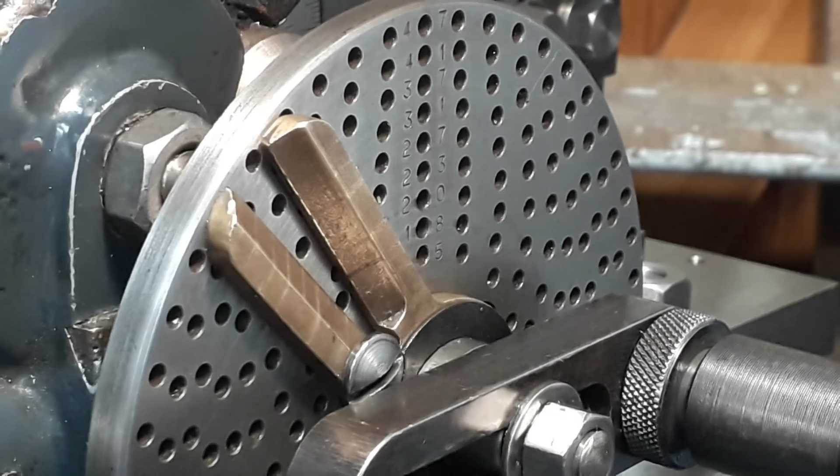But first, before we actually get to cutting, we've got to set up the dividing head. As I'm intending to cut a 14 tooth gear on this blank and an 11 tooth gear on the next blank, we need a hole pattern here which will enable us to do that.

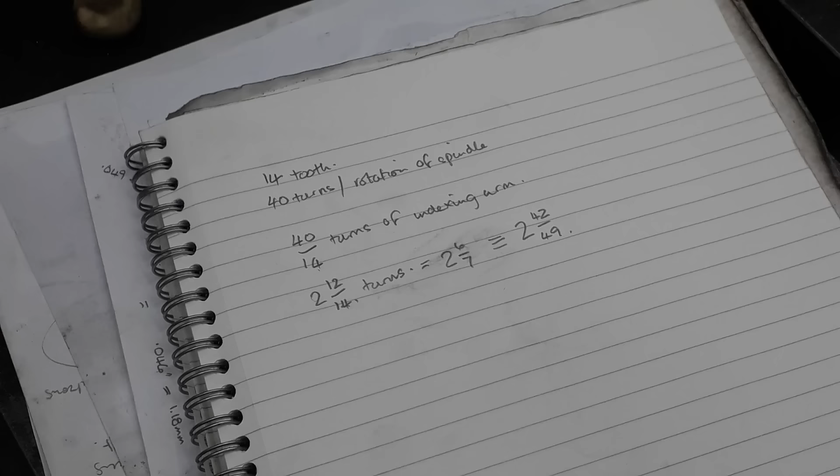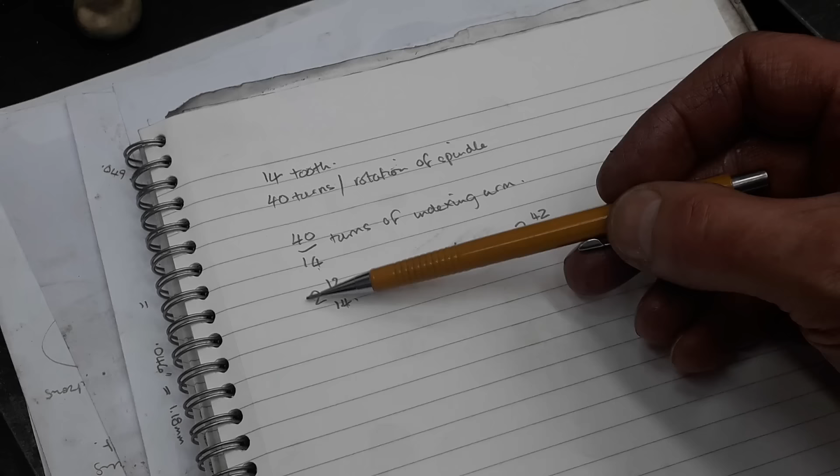So this is how I determine which hole circle we're going to need. I don't rely on tables, I just do it from simple rules. We have a 14 tooth gear. The dividing head we have requires 40 turns of the handle for one rotation of the spindle. Therefore, to index from one tooth to the next, we need 40 divided by 14 turns of the indexing arm. Now 40 over 14, if we remove the whole part, there's 2 turns plus 12/14ths. Reducing that down, that's 2 and 6/7ths in its basic form.

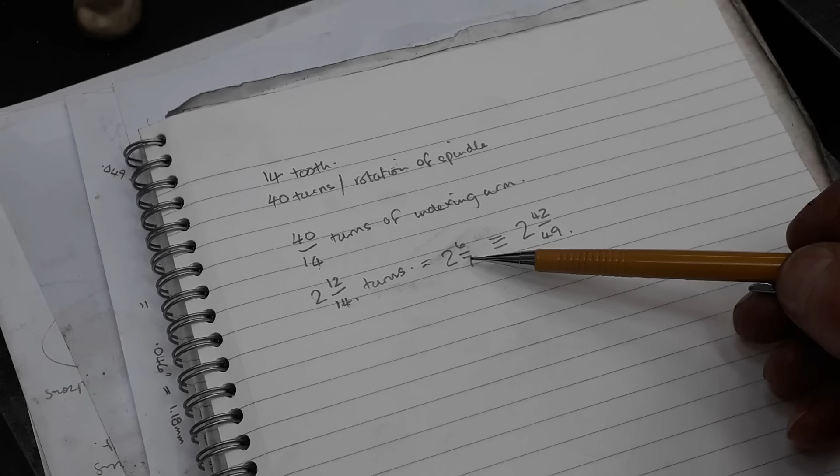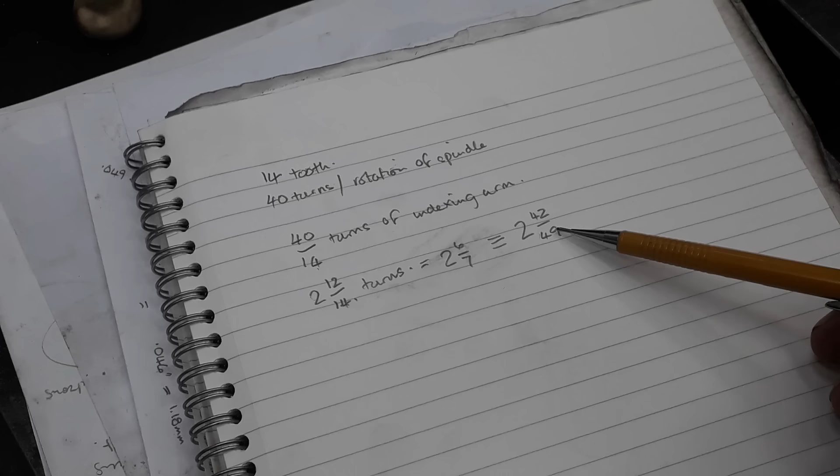So we don't have a 7 tooth plate, we don't have a 14 tooth plate, but we do have a 49 hole circle in the plate. So if we multiply the bottom by 7 and the top by 7, we need 2 turns and 42 holes of a 49 hole circle plate. And that's what we use. Simple as that.

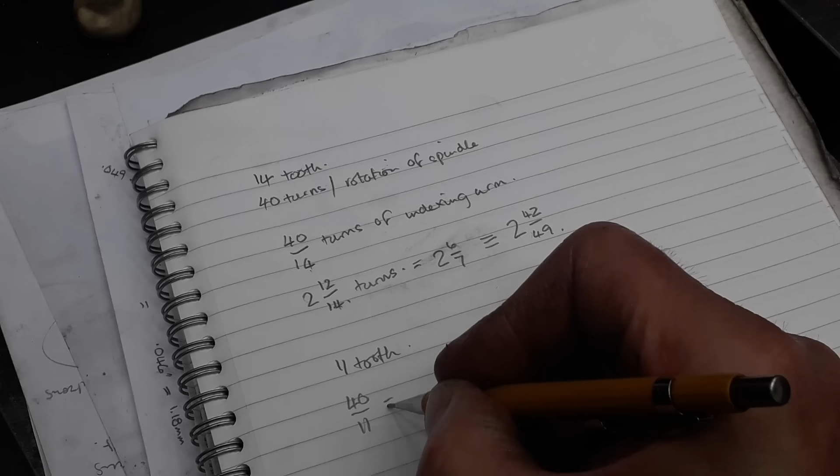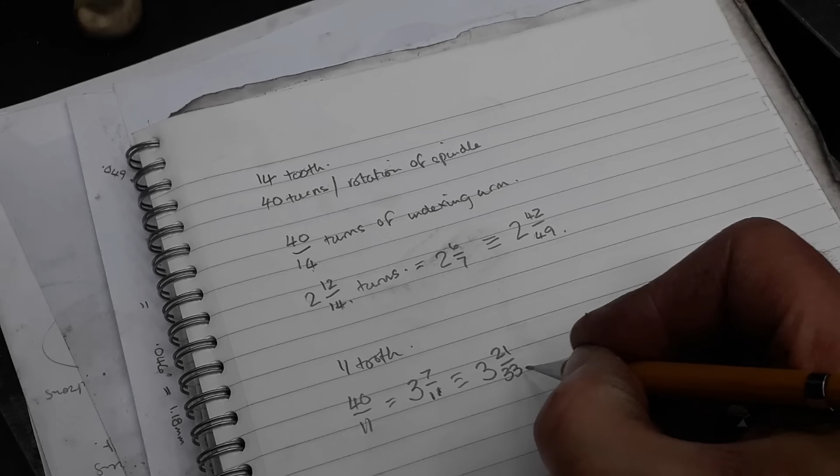If we were going to repeat it for the 11 tooth gear, we would need 40 over 11, which equals 3 whole turns and 7/11ths. Now we can't reduce that fraction any further, that's fine. We don't have an 11 hole circle, we need something which has a factor of 11 in it. We do have a 33 hole, so if you multiply top and bottom of the fraction by 3, we need 3 and 21/33rds. So that's 3 whole turns and 21 holes of a 33 hole circle in the plate. That's how we do it. Simple.

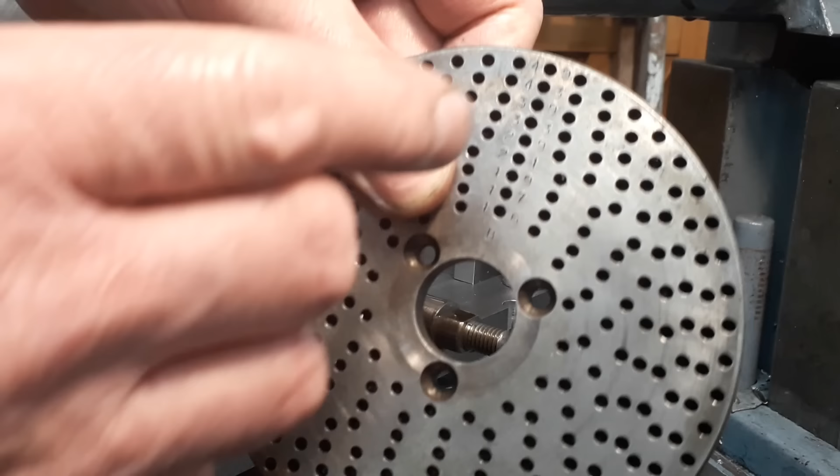So this is the plate that we need. It has a 49 hole circle there, and a 33. So this will do the 14 and this will do the 11.

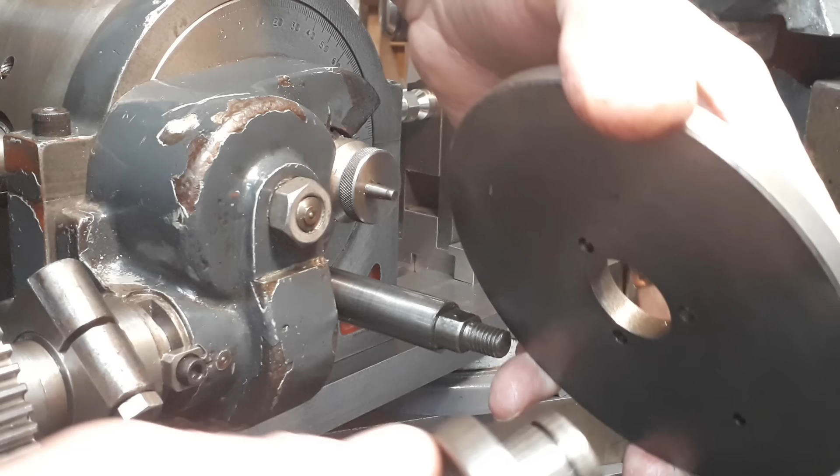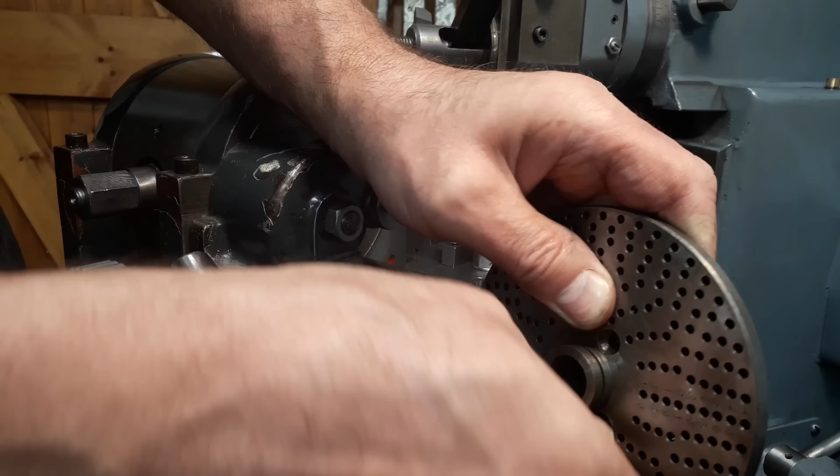So now this goes on here, line up the holes. Fiddle around and get the screws in. Drop the Allen key. Drop another one. These do not need to be stupidly tight, they're not really taking very much force. And as they're these countersunk headed ones, if they're done up too tight, they will only be more difficult to undo, and then the little hex heads will give way and I'll be left looking for some new ones.

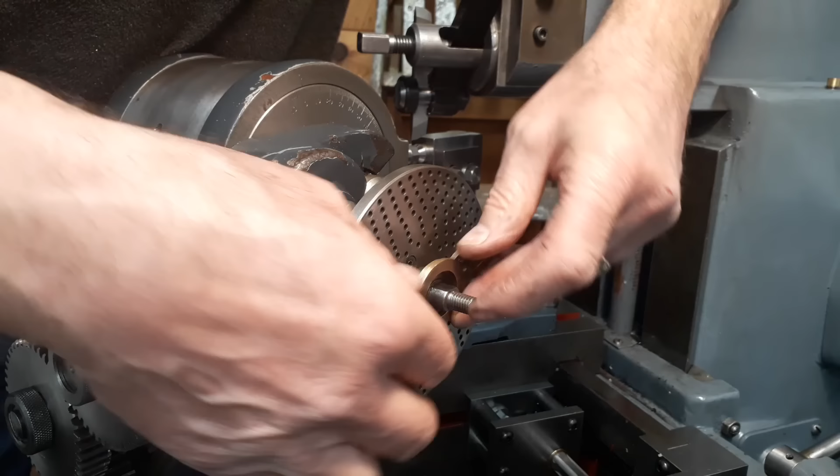So that now goes back on there. I'll dig out the sector arms. And two. Pop the clip on. Rotate the arms. So this little screw can go in. And these are ready for setting up.

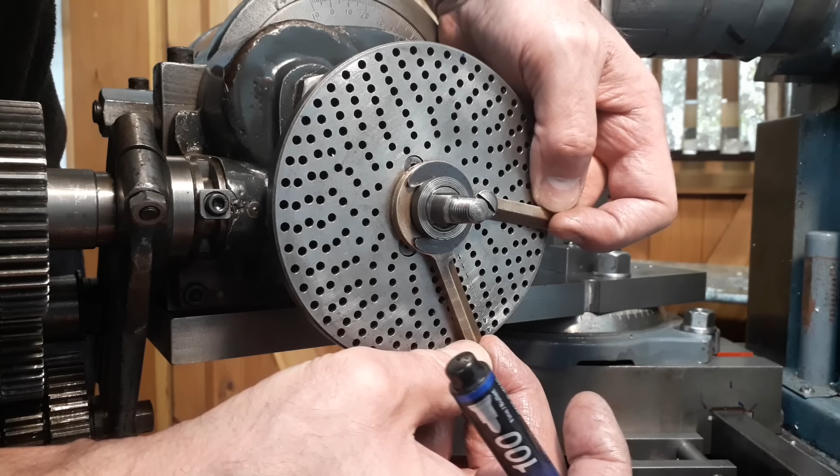Okay, so now we determine where to place the sector arms. We're going to use the 49 hole circle, so we're going to start off in this one here. We then need to come 42 holes past this one, so we don't count that one. Then we'll have to go to that position there, so that's where we'll tighten it up. Normally you do this with the indexing arm on, but because it's off, it's actually easier to do it while it's off, so I've taken full advantage of that.

And there we are. We will move from there, go all the way around the outside to there. We will then advance this like that, and then the next time we'll have to go all the way around to here, not forgetting to make the 2 whole turns as well.

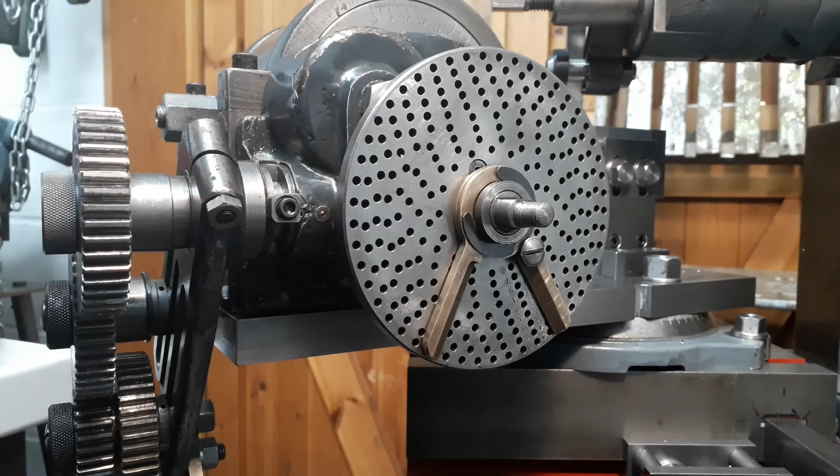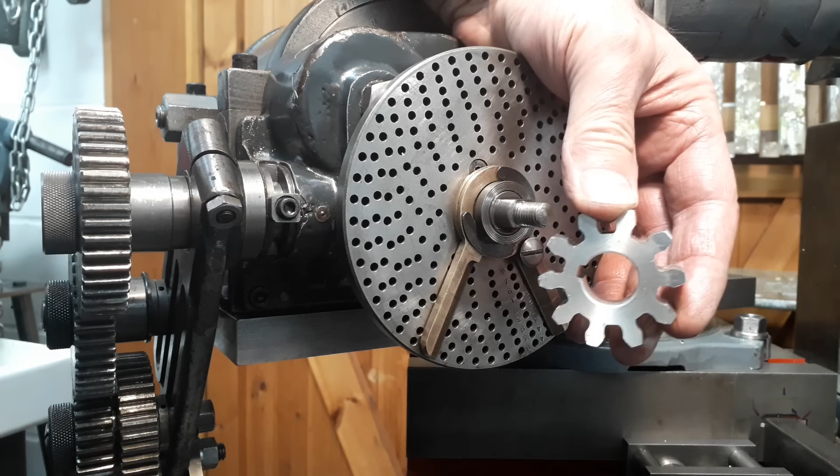It's worth taking a bit of care over this, because if you get it wrong, the results are, shall we say, disappointing. When I was testing out the spur gear fixture at one point, I just wanted to prove that it would cut the undercut properly and create a gear. This has got far too few teeth for the size of gear, but just purely as an experiment, I cut this one in aluminium, and this, as you can see, is a 10-tooth gear. Now, if you get the indexing wrong, what you end up with is something that looks much more like this. As you can see, this is a 9.5 tooth gear. It doesn't work.

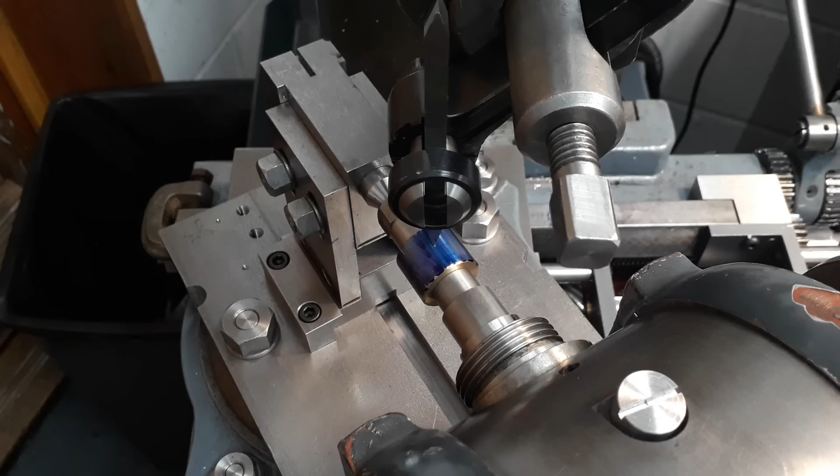Okay, so if you've sat through all this video so far, now we've finally come to the point that you've been waiting for. We're going to cut the gear. So I've blued up the blank, I've checked all the nuts and bolts around everything to make sure everything's tight. I've oiled all the gears, everything that needs a touch of oil, and I'm ready to set it going, feed the tool slide down until it scratches on the workpiece.

I then need a depth of 108 thou from there. So let's begin. You've got pretty much the view that I've got from up here. In fact, if truth be known, you're slightly closer.

Here we go, we are just scratching the surface there.

I'm going to take a first cut of, say, 50 thou. This is bronze, not aluminium, a nice easy machining bronze, C660. So firstly, let's wind everything back to about here. Should be a good starting point. Let's put on 50 thou of cut.

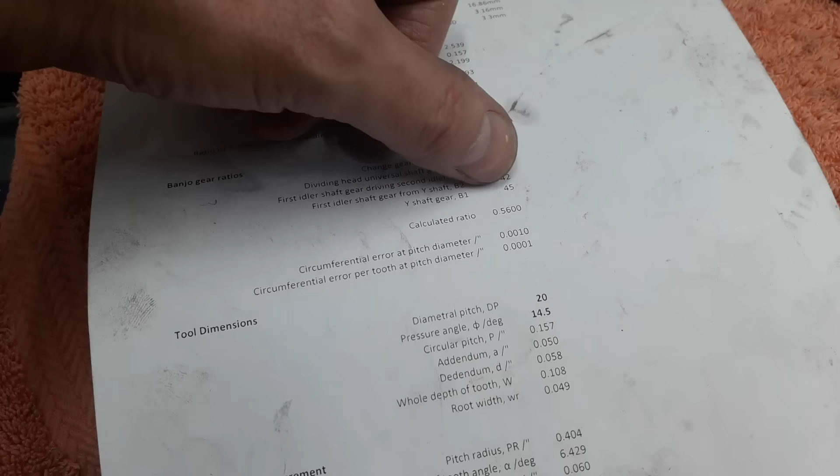We need a ratio of 5598, and what I've effectively done is I've put the 45 gear on the dividing head, whereas it should have the 24. So I've got the gear train backwards, so it's feeding far too fast. Whoops.

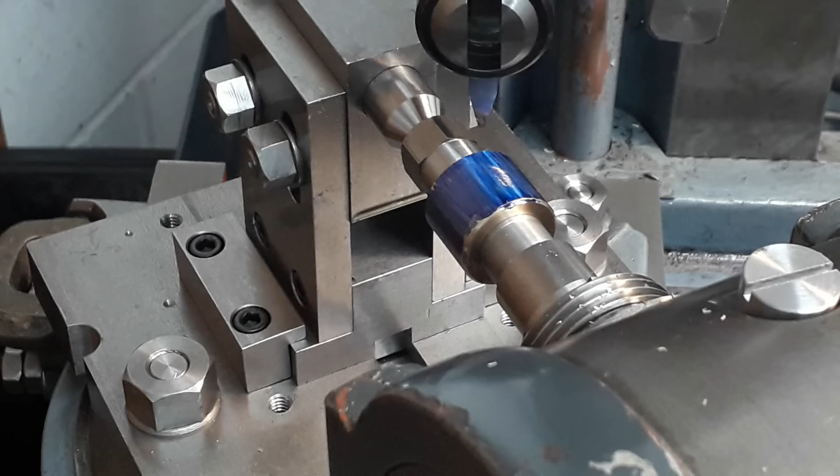Right, we're ready to go again. We have the replacement gear blank in there. Everything is set up as it should be. I've had my trial practice on the one that I stuffed up.

So let's get the shaper moving and touch off and then start cutting the tooth. We're going to go 50 thou at a time.

Okay, this is failure number 2. Whilst I was messing around with another camera, let me go handheld and show you what's happened. The gear down here, the helical, is disconnected.

And so for the third time of asking, let's touch off and put some cut on. There we go, just touched off. Here we go, cut's just starting. Clear, and off we go again.

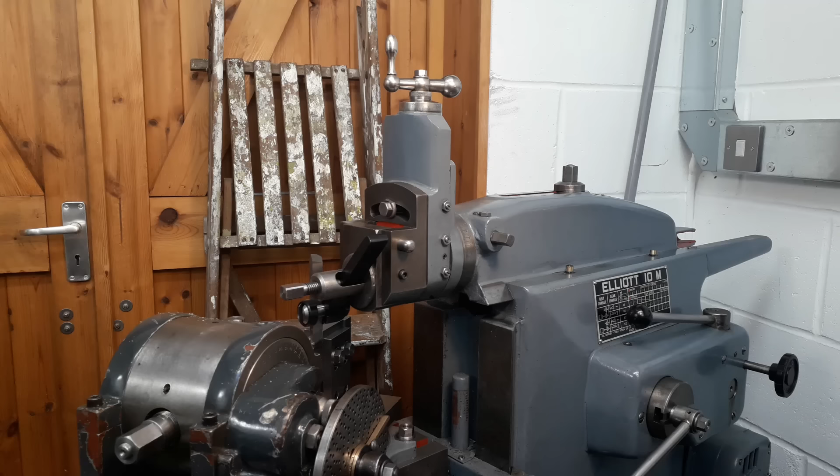Right, time to set up for the final pass. Now, the depth for the gear should be 108. I'm going to give it another 2 thou to give it a little bit of clearance for backlash so that it will run at the expected spacing.

Last but one tooth, just this one, the next one, then out it comes, bit of deburring, clean it up, and we'll have a look at it on the bench.

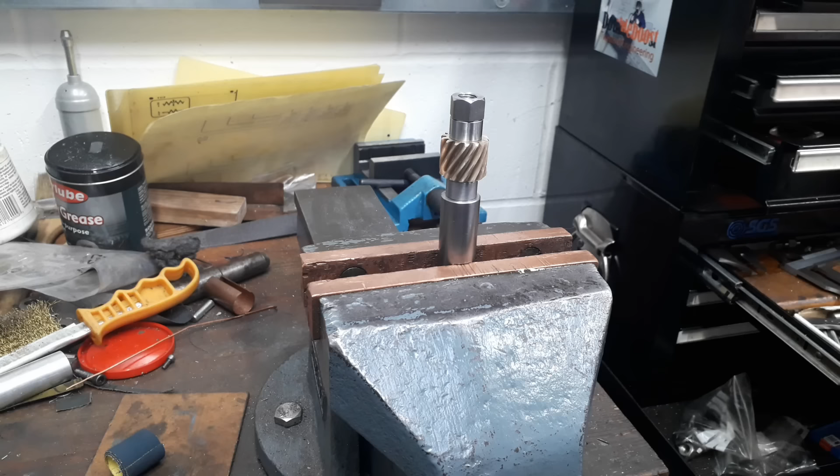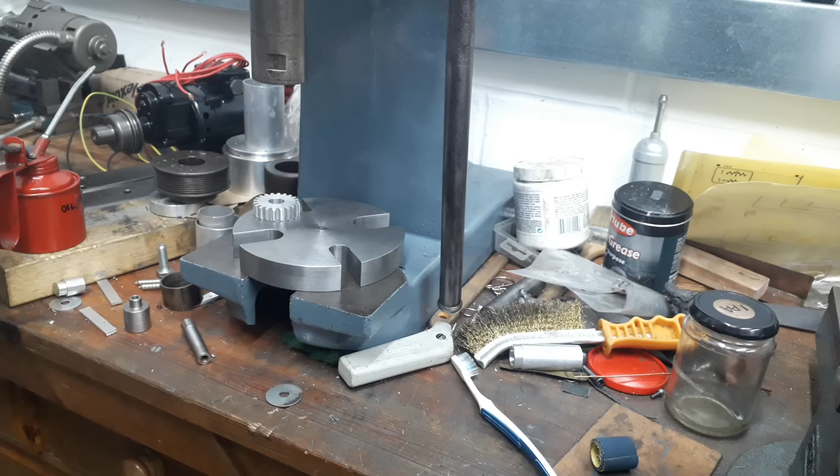There we are, all done. Okay, so here we go. Pop that in there. There it is. That fits in there.

Don't know why I put my finger underneath expecting it to drop out the bottom. That would have been going some. There we are, if it will focus.

Now to cut the next gear, this is the gear blank I'm going to use. It's going to be a 20 dp gear, the same as the previous one. This one is a little bit smaller, hence I've not put it on an arbor - it's actually part of a spindle. This one will be 11 teeth. It'll be 30-degree helical, just like the last one, but I'm going to make this one a left hand, which means that they will then mesh together with parallel axles.

So the first thing to do is going to be to disconnect the drive shaft down here. So, I'm going to slide off the banjo.

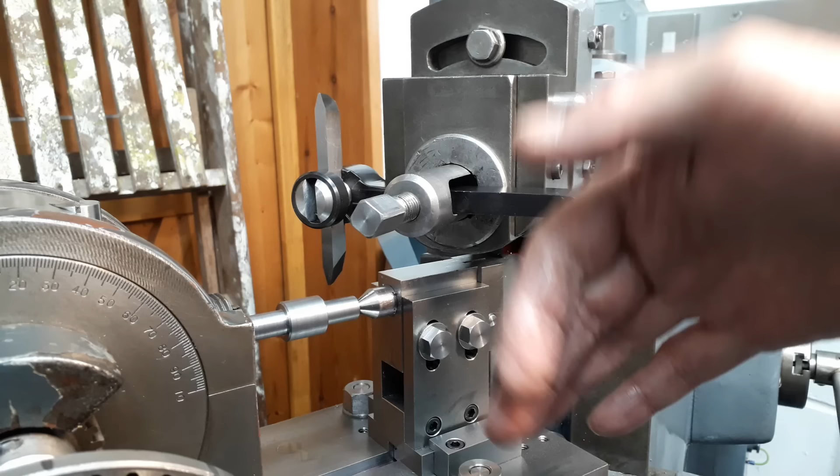As it's a left hand gear, if I bring it back on centre, the whole table will move so far to the right to do the cut that you run out of stroke basically on the table. The table will crash into the gears.

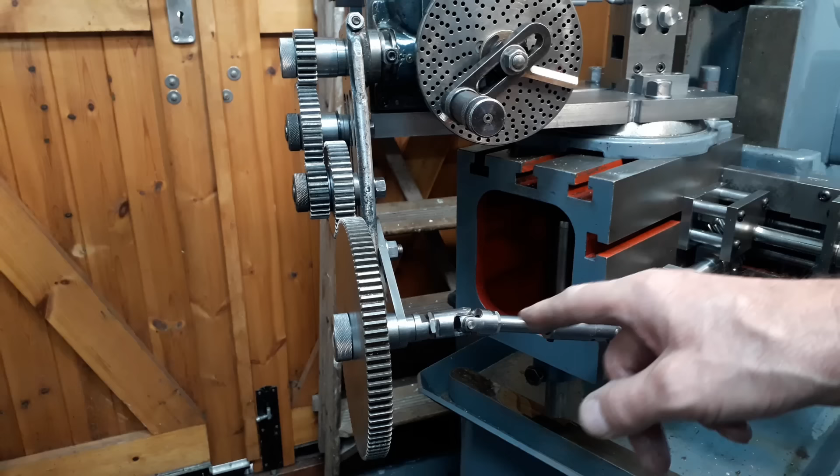So here we have the new gear train set up. This time I've verified it on a blank to make sure that it is cutting correctly. It has to be, this big gear has to be angled right over here as far as possible to keep the angle on this universal joint as low as possible. Otherwise it's not very smooth, it doesn't work very well. I mean, these things go to 45 degrees theoretically, but they don't work very well once you get anywhere close to that.

But it's already all set up. The indexing is all set up and ready to go. So let's cut the gear. Clutch off. A little bit heavier than I wanted, but that'll do.

Bring it back. Put 25 thou on. Lock the tool slide. And off we go.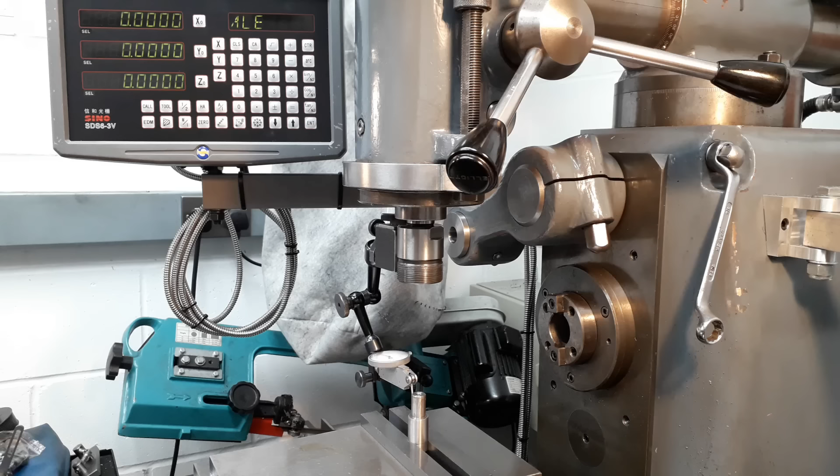So I'm going to attempt to measure the distance between the two shaft centres when these gears run nicely. If you get them too close together, they grind. If they're too far apart, that's difficult to tell because there'll just be a lot more backlash.

I'm going to use a technique that I borrowed from another channel, from Tom's Rabbit Hole. If you're not familiar with that channel, I'll put a link in the description. But if you're into gears, Tom has a homemade hobbing machine that he's been building, and there's a lot of interesting content on there, so well worth a watch. Anyway, thank you, Tom. This is his technique, and we'll attempt to use it to measure these two gears.

In the vise of the mill, I have a stub shaft. I have a DTI which I'm rotating around the stub shaft, and it's indicating to me that the spindle is now concentric with the axis of this stub shaft.

I have a DRO on the mill which I'm going to use to measure the position of this stub shaft relative to the spindle. So this has been zeroed out. I've zeroed the DRO.

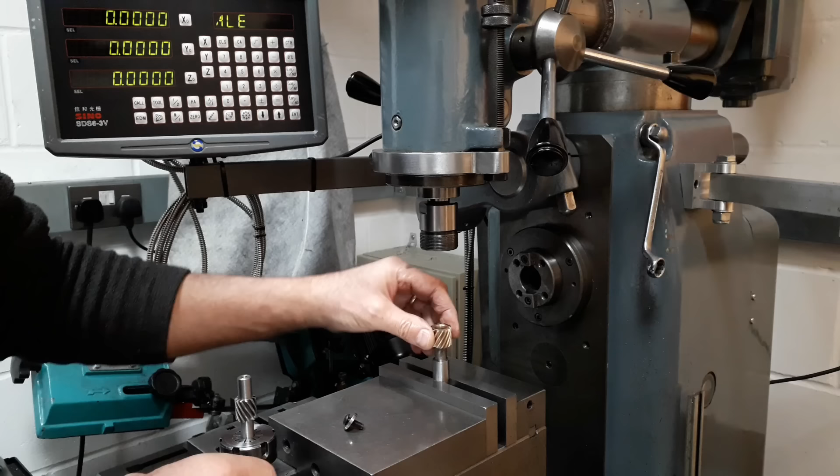So now we'll remove the DTI, place this little bronze gear on the stub shaft, rotates freely, put a washer and a bolt. This will keep it captive. As these are helical gears, there is axial thrust on them, up or down depending on which way they're going. That's now still free to rotate. I've got the 11-tooth steel gear secured in a collet.

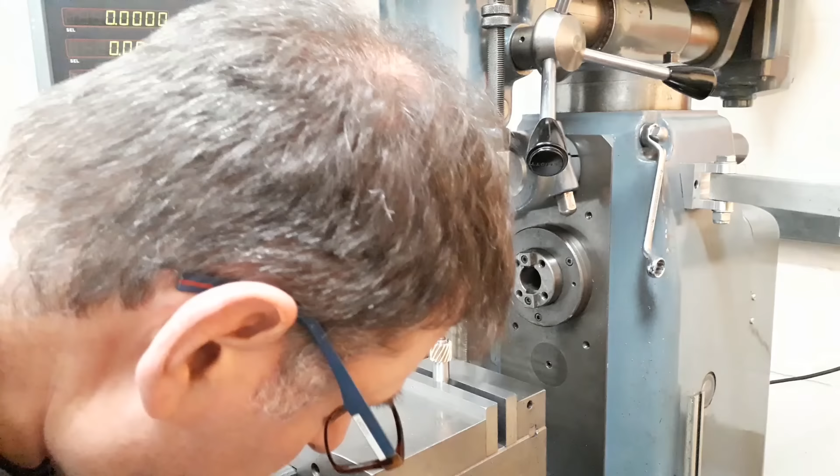Which will then nip up tight. Let off the emergency stop. DRO is reading 0. We will now back the spindles away from each other.

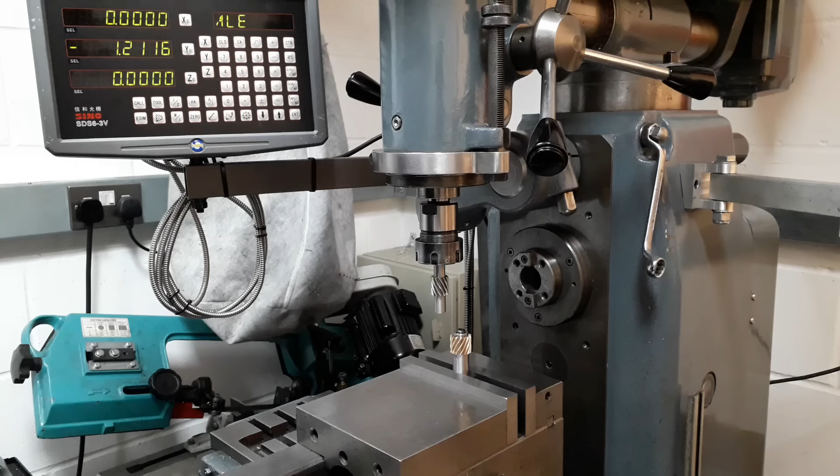I will now raise the knee until the two gears are at the same height, like that, and then bring them slowly together and bring them into mesh.

So now they're in mesh, and if I operate the spindle, they rotate very nicely. I'll bring the two gears closer and closer together until they start to grind. Then I'll back off until they run as quietly as they're going to. And at that point, we can measure the separation on the y-axis here. That'll be the separation between the two spindle axes. We can then compare that with the ideal.

Can you hear the grinding noise? Somewhere around there? They sound reasonably good. So we have a figure of 721 thousandths.

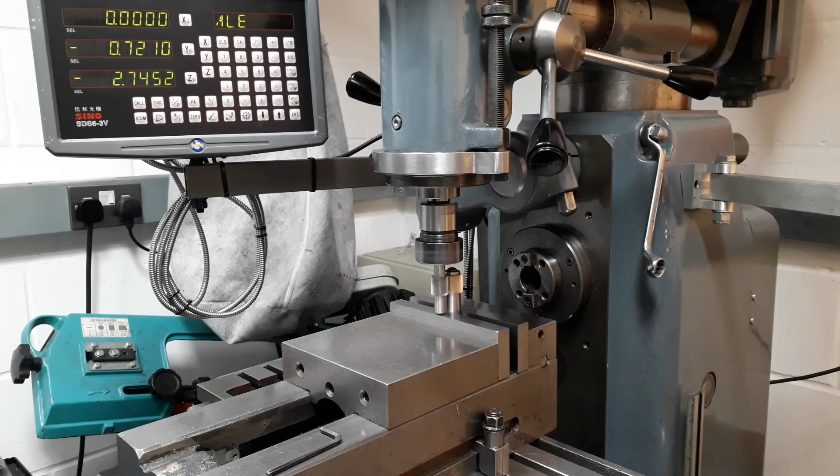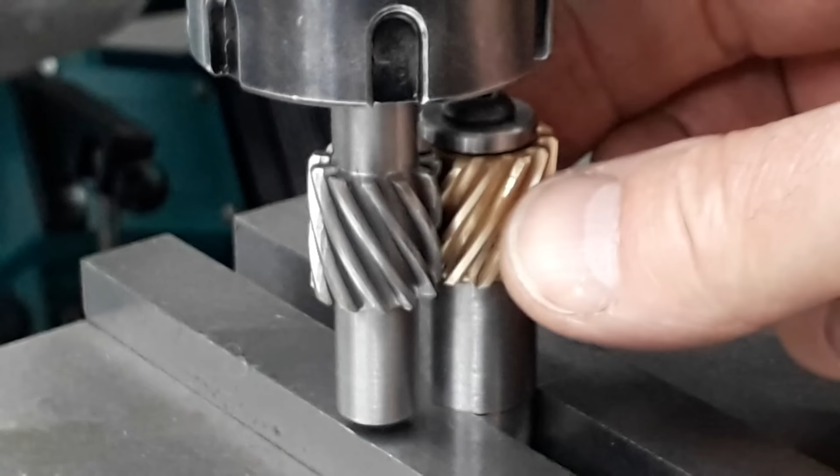So zoom right in, this is the pair of gears at the spacing we've just measured, and there's just a tiny little bit of backlash on it, which is pretty much how you'd set up your change gears in your lathe.

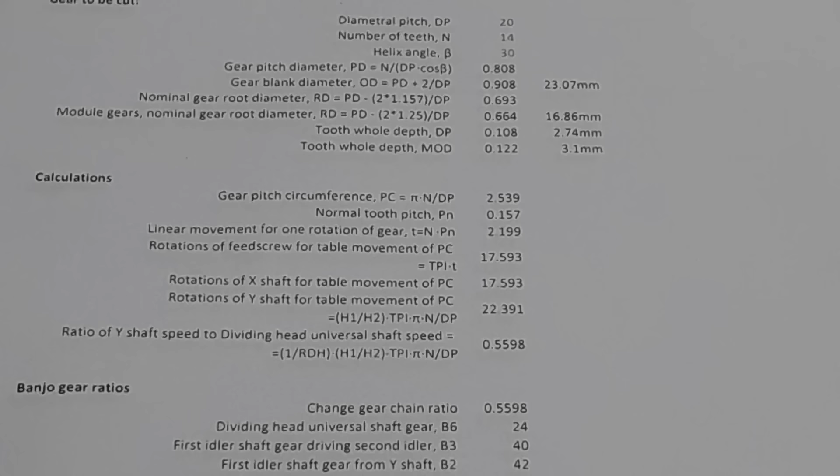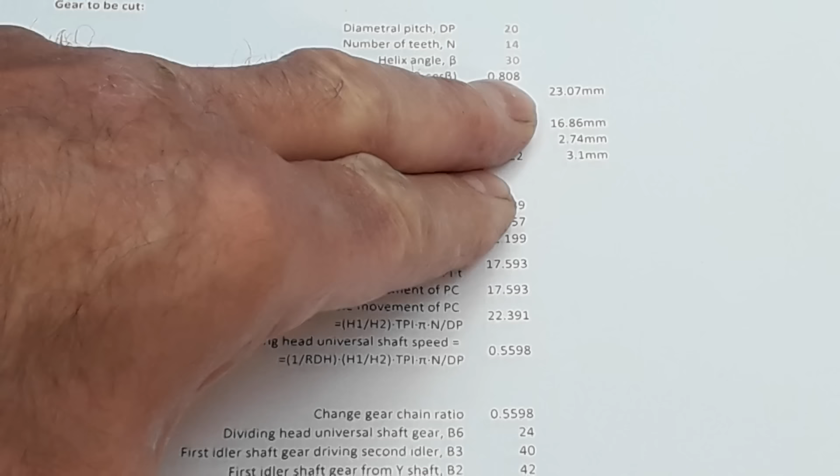So this is the spreadsheet printout for the 14 tooth 30 degree gear, and it tells us that the gear pitch diameter is 0.808. The same spreadsheet printout but for the 11 tooth gear tells us that the gear pitch diameter is 0.635.

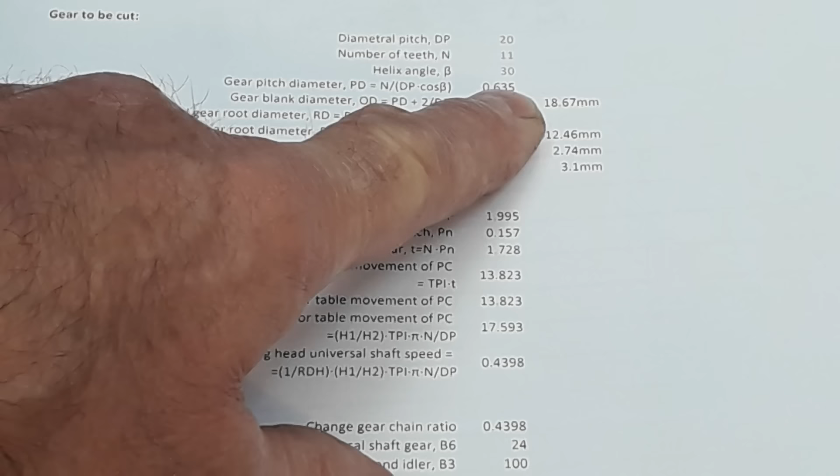So if we take those two figures and do 0.808 plus 0.635, we get 1.443 inches. Divide that by 2 for the spacing. So this is the sum of the pitch diameters. What we actually want is the sum of the pitch radii. So if we halve this value here, we'll get 0.7215.